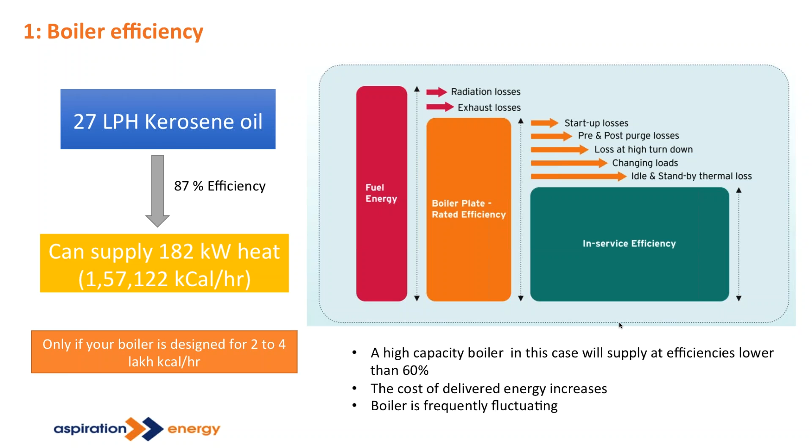So what is the message? A high-capacity boiler which is being used at a very low capacity will have lower efficiencies. And as a result, your cost of energy will significantly increase. And the downside in terms of maintenance of the boiler is it is constantly fluctuating. So that essentially kills the boiler. So what do we do about it? We look at how to manage loads and fluctuations.

So what does it do? It ensures that your boiler is always running at its design load and it fills the steam into an accumulator. And the process is being supplied by the accumulator. And whenever there is a huge sudden demand of steam, the boiler also comes online. So you can meet the surges in your demand, but at the same time make sure that the boiler is operating very efficiently.

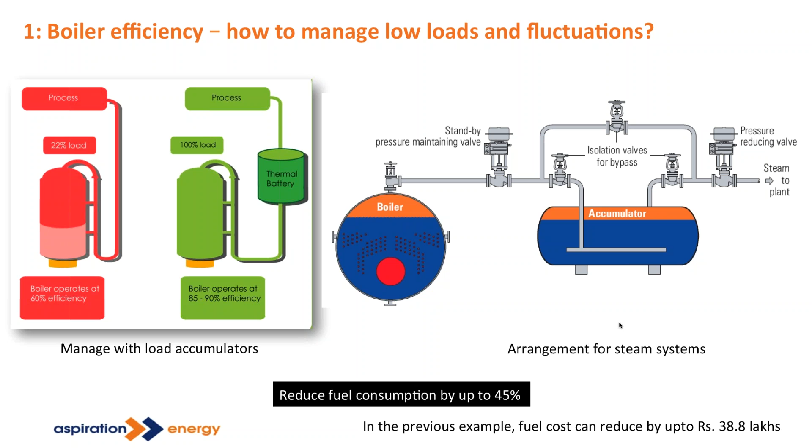And by the way, if you are able to put up an accumulator and make sure that your boiler efficiency is always at the design efficiency, even at 27% gain, from 60 to 87% in the previous example, we could save or avoid the loss in fuel cost by about 38.8 lakhs. So that's just simply by making sure that the boiler does not operate too far below its design point. What else can we do?

Of course, one of the interesting features about an accumulator is that it acts like a buffer. So it can act like a buffer both on the supply side and also the demand side. So this allows us an interesting opportunity to integrate with renewable sources of heat like solar thermal, where you put in a solar boiler and then you couple it with an accumulator or a thermal storage system. This allows you to really make sure that your process conditions are not affected. So now you can go from solar thermal being a very finicky, infirm source to a very reliable industrial product.

And this can be the situation. The heat primary side can be any source. It can be a boiler which is over-designed but wants to run at a high efficiency. It can be a heat pump, or it can also be a solar thermal system like what we have shown here.

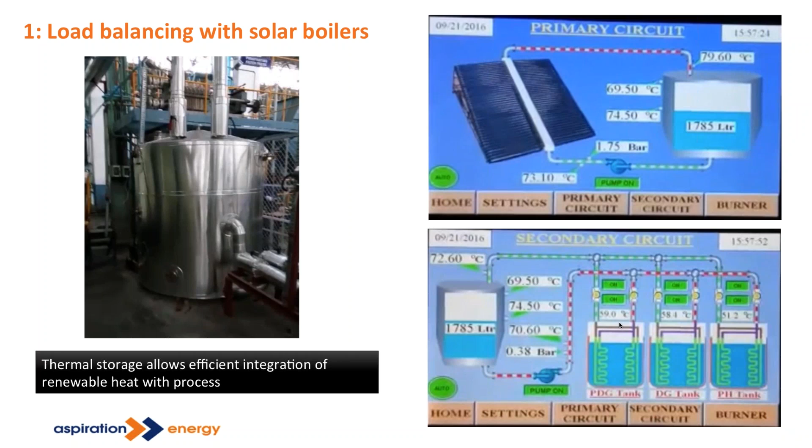The second most important thing in terms of understanding our process heating needs is really understanding the process losses. So we are a little familiar with the losses when we say, okay, I need to insulate my pipeline because my pipeline is at a high temperature, my ambient is at a low temperature, so I'm losing a lot of heat. But in many applications we are using hot water in a bath, in a big tank,

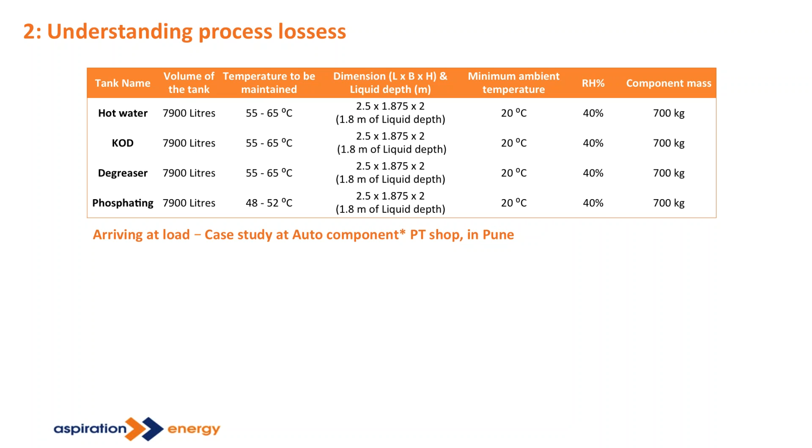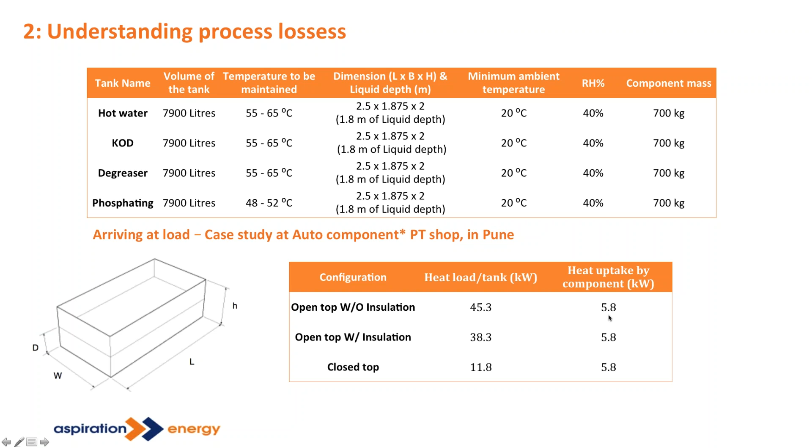If you can see, without the insulation, the heat load required by the tank to maintain that particular temperature is about 45, whereas the actual energy uptake by the component is only about 5.8. So it is surprising. Your actual component, for it to be pre-treated, needs only about 5.8 kilowatt, whereas maintaining the temperature in the tank takes much more, because from the surface there is a lot of heat loss.

So essentially, understanding where the loss significantly comes from can go a long way to reducing your process energy bills. So here is where understanding the process and looking at heat losses step by step helps. Just for example, in this particular case, if we are able to close the top, you can see the heat load from the tank has significantly dropped by about 4 times. So that gives you an order of magnitude.

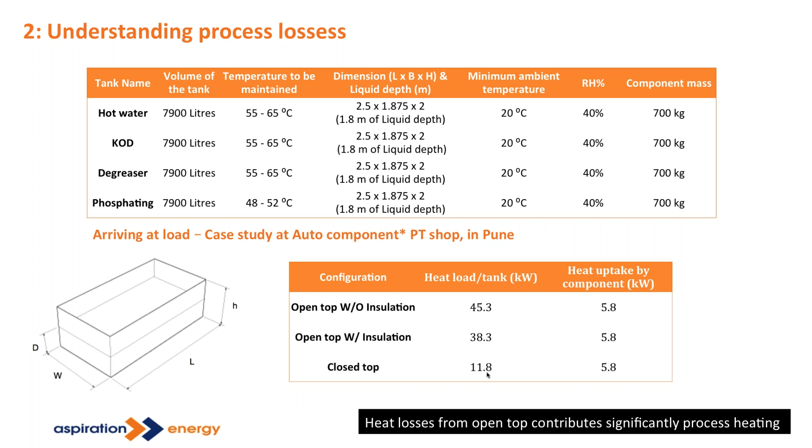So what next? The major problem that we normally face when we deal with thermal systems, the reason why we are not aware of heat losses, of how much fuel each unit of thermal energy costs, is because we don't really monitor the thermal system performance. Electrical energy is a utility that is metered and sent to us. We have an electric meter and we are very conscious about utilization of electrical energy. It is a standard product, it is easily metered, but thermal energy is often something that you generate by yourself.

And the crudest or most basic method of measurement is the amount of fuel you consume. But that does not tell you, are you consuming the right amount or much more than what you need? So do we have any solutions at all? The measurement of thermal energy has to go back to the basic fundamentals: if there is a flow of heat, I should be able to measure the temperature and the flow rate of the medium which is carrying the heat, and then I will be able to measure it. So essentially it requires you to put together a small system.

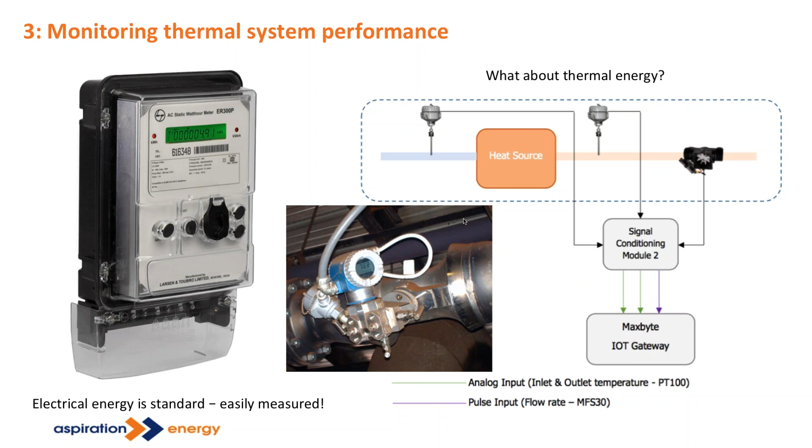So thermal energy monitoring essentially allows you to constantly improve the heat utilization process because the paybacks are quite high, and it also allows you to continuously keep track of your energy efficiency program. So if you have, for example, done an energy audit and you have done everything recommended in the audit to make sure your plant is the most efficient, without monitoring, systems go out of it. So whatever energy efficiency gains you have achieved, it is not visible, it is not documented, and it goes down the drain. So what I think is that the reason why most of the energy audit recommendations from thermal energy audits are not implemented is because there is no exact way to identify and attribute causes to the energy saving from thermal systems, so it just goes away.

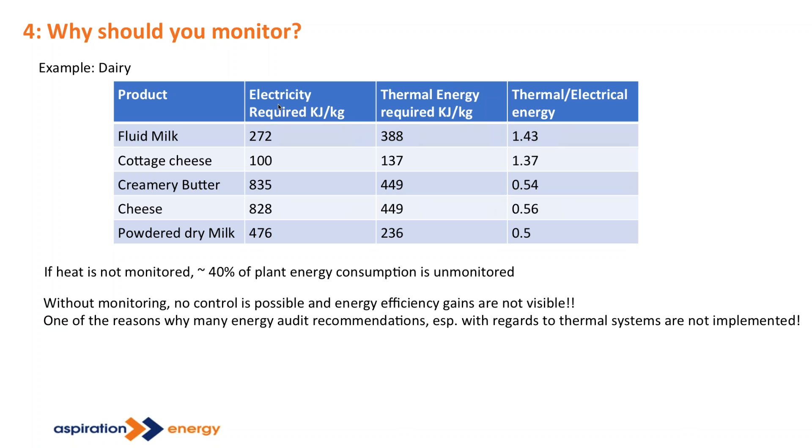Number 5, what else can you do? So for example, you already have your boiler and you already are using the system, and if you are really serious about thermal energy, where are my opportunities? So again, going back to the basics, the first place to look at opportunities is the sources. So when we are looking at sustainable ways of process heating, we have to really look at the utilization of our fuel. So for example, if I have a block of coal, what is the best way to utilize that block of coal so that I can get the maximum energy possible?

So the most common implementation in most industries is to have an economizer. So what does an economizer do? It simply preheats the feed water into a boiler, and it improves the efficiency by taking heat from the exhaust gases. So this is very useful if your fuels are of the kind with low sulfur, where you can cool your exhaust even down to 100 degrees C, and then you can preheat your feed water. Economizers can add up to 10% on your efficiency.

In some applications, if your feed water is already preheated because you have done an excellent job of condensate recovery and recycled your hot water from all your processes, you can go ahead and utilize an air preheater so that you can improve your combustion efficiency. So that way, you know that for the kilogram of fuel that you're burning, you're getting the best possible energy output. But you can also ask, can I go towards a different kind of boiler so that I'm utilizing coal to a slightly higher potential?

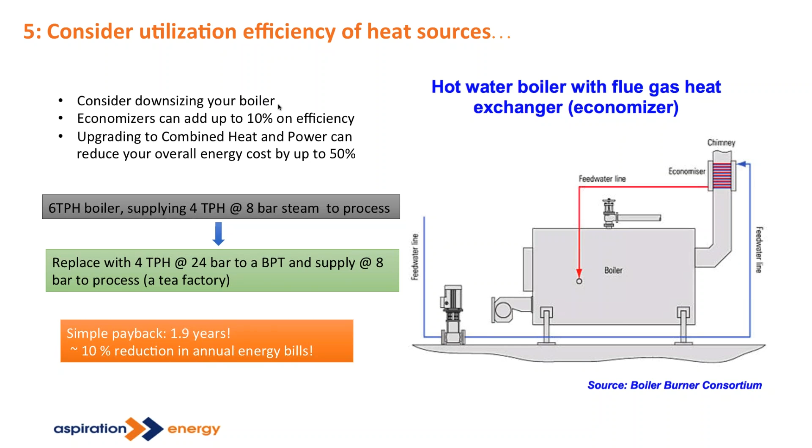So it is about time for you to consider, especially people who need heat less than 100 degrees C, seriously consider stopping burning any of these fossil fuels and switch to electricity as their primary mode. Now you may ask, how can I switch to electricity? Because electricity is more expensive than all the other fuels except diesel.

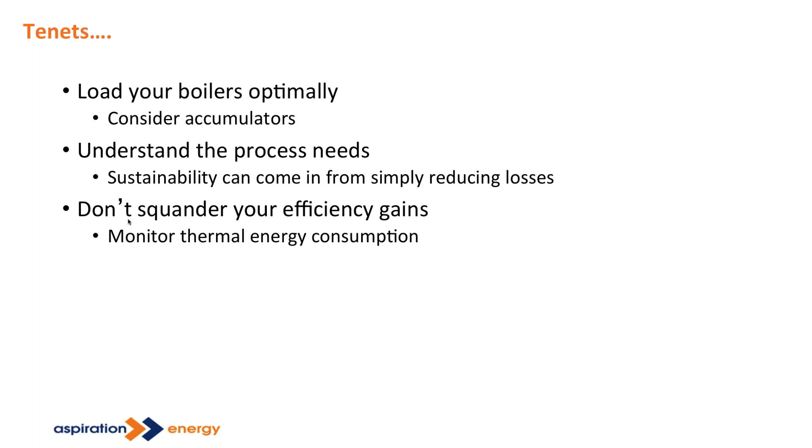Right now, you do have certain process control parameters like temperature, but the energy consumption by a process essentially tells you: is my process consuming the right amount of energy required, or is it consuming more, or is it consuming less? Each of which is a case for an alarm, and it allows you to really monitor your process and make sure that you are having the best consumption possible.

The fourth thing is consider utilization efficiency of heat sources. The big word here is exergy, which is the availability or available potential of energy. We generally talk about energy conservation, but you would have learned in thermodynamics early on that energy is neither created nor destroyed. So when we talk about energy conservation, what we are really referring to is its potential to do useful work. So as you start considering the efficiency of heat sources, you're doing the environment a huge benefit, and it's basic economics as well: you're improving your sustainability by utilizing the energy at its best efficiency possible.

And the last point I want to make is switch to alternatives. We have been burning fuels for a long time, but now the alternatives have become cheaper than you think, even without subsidies. It can make attractive economic sense, and it definitely makes attractive environmental sense. When you consider sustainability as your energy practice, it starts with the mindset that I have to use energy as efficiently as possible, which means switching to alternatives whenever sustainable heating becomes cheaper. Right now it is getting there, and many sustainable sources of heating are cheaper than you think.

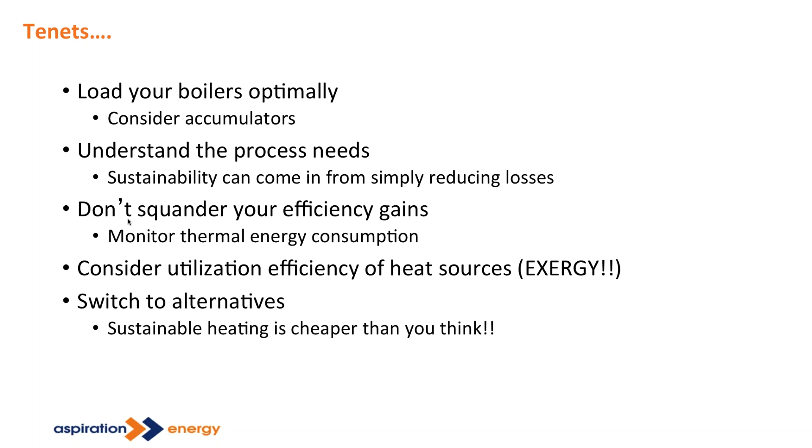So with that, I come to the end of my brief talk on the sustainability practices that you can do in process heating. I am open for questions, so feel free to post any questions.

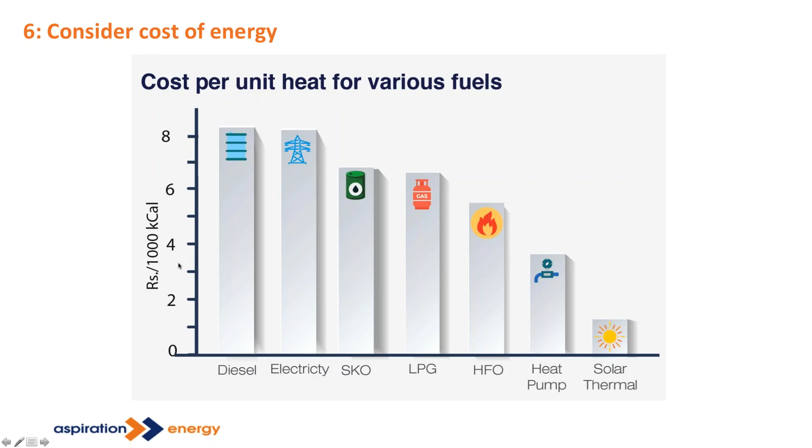So this particular slide is slightly dated in terms of the cost of energy, but then it gives you an overall idea as to how these things work.